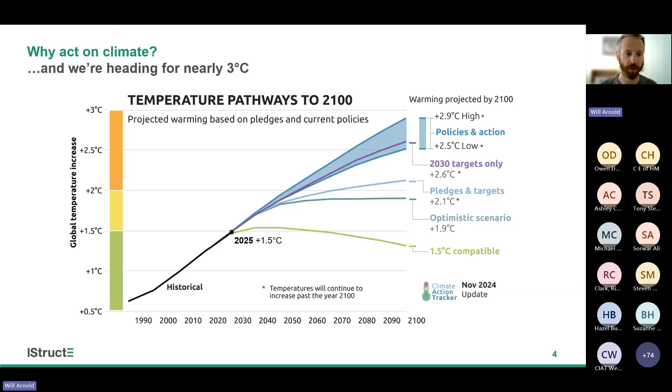They're going to be in their 80s. So this is real stuff that's happening to real people today. And those photos on the previous slide are just a taster of what's to come. This is only going to go in one direction. That's the sort of moral imperative.

But at the same time, we've got a bit more of a financial and legal imperative on this as well, and this is going to get stronger as a result of what's happening to climate. We've had senior people from banks such as Allianz speaking out recently to say that at about 3 degrees C, the property industry may well become totally uninsurable.

The insurance market, when it comes to property insurance, works on the basis of them hedging their bets against all of our properties. You pay them a bit of money each year, enough people do that, they build up their dividends, and every now and then they'll pay out in response to something like flood damage. But what they're saying is that at 3 degrees C, those weather-related impacts are going to become so frequent and so severe that they wouldn't be able to make any money out of this as an industry.

And at that point, property insurance ceases to exist. At that point, mortgages disappear. This entire industry has this existential threat that we're looking at if we don't get climate change under control. That was a quote from a senior figure at Allianz.

It's interesting to note that if you look back about 10 years or so, the chief exec of AXA around that time said almost the same thing. He was saying it at about 4 degrees was his guess for that point in time. Allianz are now saying 3. It'd be interesting to see where that figure has been put in 10 years' time from now. But this is a significant, a serious, and a real world thing.

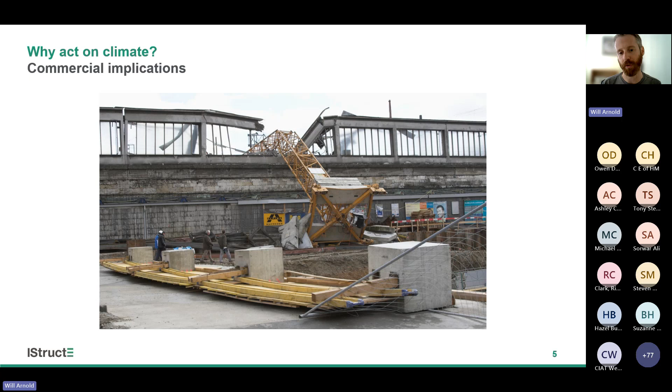And again, this is a reason why we need to act. And just in case the commercial bit and the moral bit wasn't enough, and you feel you need something more to argue with your clients or your collaborators with, this is moving into legislation now. This is only going to go in one direction from a legislative point of view.

This is what we see overseas in the EU. The EU have mandated that from 2028, embodied carbon submissions will be required for all major projects. And from 2030, that will be extended to projects of all sizes, and will also then include legal limits on the amount of embodied carbon you can emit during construction.

We've seen countries doing this for a while now. Nordic countries for several years, France for 2 or 3, the Netherlands I think for about 10 or 12 years, they've had this sort of approach in place. And we even see this happening in states of the USA. So California, Colorado, New York, Oregon, they're the big 4 that always stick in my mind. They all require embodied carbon reporting. And this is in the USA with all of the stuff that's going on around climate and legislation at a federal level.

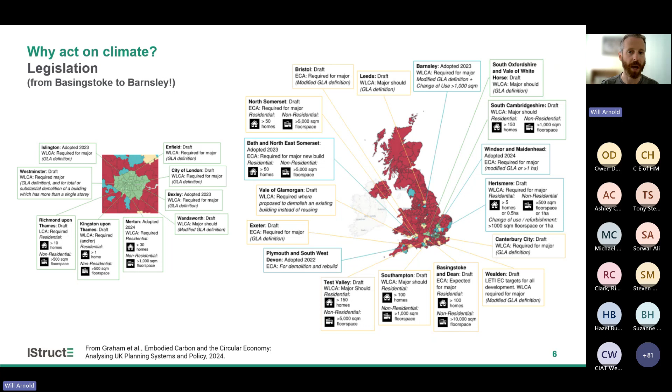The UK will follow suit. It's inevitable, just a matter of time before it happens. So that's the contextual bit, the bit that tells us the need to start caring about this. We now need to move on to what we can do about it.

If you're not aware of who the IStructE are, we've been around for just over 100 years. We're the world's largest membership organisation dedicated to structural engineering as a profession. We've got about 30,000 members, about 2/3 of those in the UK, and the other 10,000 spread around the world. We cover nearly 140 countries.

What's important, and the reason why I put this slide in when I speak to external groups, is that we have a royal charter that means we have to exist for the public benefit. The reason for an institution like ours to exist is to help protect the public when it comes to their buildings. We were set up in response to the rising use of reinforced concrete back in 1908, the turn of the 20th century.

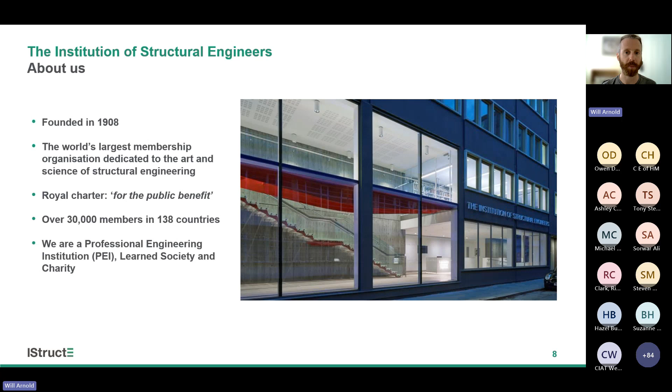About 5 years or so ago, our board and council made a commitment that from now on we would treat sustainability the same as safety, because they are, in effect, one and the same thing. This has led to all sorts of changes in the way that we do things.

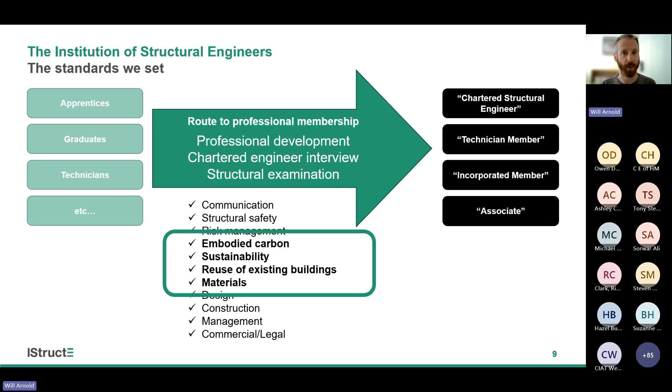If you want to become a chartered structural engineer now, as part of that you'll be tested on whether or not you can calculate and reduce embodied carbon, whether you understand sustainability in broad terms, your experience of reuse of existing buildings, and what you can do with materials. These are now requirements to become a chartered structural engineer. So if you're working with one of those structural engineers, you can have that requirement as well. You should be able to speak about this stuff fluently with those engineers.

That's a sort of entry level thing for existing members who are required to complete CPD returns every year. We now mandate that they tell us what sustainability CPD they've done as part of that. We pull that out as a separate thing. So we're pushing this at all grades.

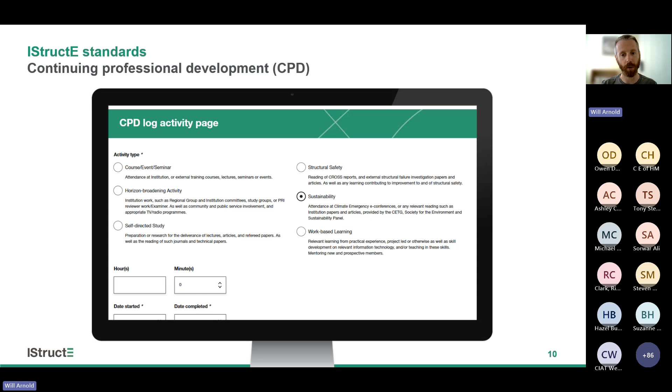At the top end of what we do as an institution, when we have our yearly awards, we refocused all of this a few years ago as well. It is now impossible to win a structural award without understanding the impact that your project has had on the planet. We've refocused our awards around the outcomes that result from our projects. If the outcome is that you've emitted bucket loads of carbon, way more than would be normal for the sorts of buildings you're working with, the judges need to be convinced as to why that was worth it. What was that ecological investment giving to society? What was the return on investment, if you like?

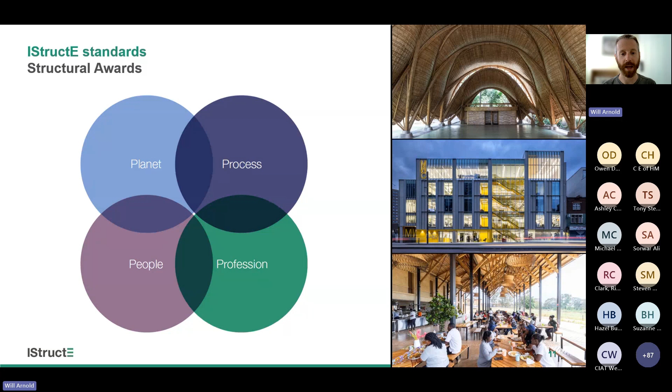As a result, what's been really interesting is we still get some big, bold projects entered into the awards, and some of them still win because there are very good reasons why people have done the things that they have. But what's been really interesting is we've also seen this whole new broadening within the awards, looking at a much more international set of projects.

Let's take a quick swig of water.

So that takes me on to the guidance we've produced. The first thing I always point people to on this topic is our sustainability resource map. If you search for sustainability resource map IStructE on Google, or any other search platform, this should come up.

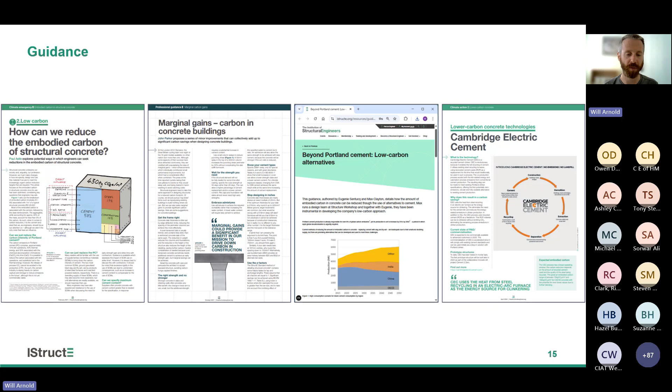There's then some other big hitting pieces within that. The first one I'd draw your attention to is this pair. On the right hand side, you've got the how to calculate embodied carbon guide. It's downloadable as a PDF, free for anybody who wants it. You have to make a login, but that's just so we know you've got it, so that when we create the 4th edition, you get an automated email telling you to download the new one.

What goes alongside this guide is the tool on the left. It's just an Excel spreadsheet, but it basically automates everything in the guide to save you time of having to do it yourself. These are probably 2 of our most popular downloads from our members. We know that something like 2/3 of our members now carry out embodied carbon calculations with most of their work, and about 2/3 of them use our tool to do this. So it's proved pretty popular.

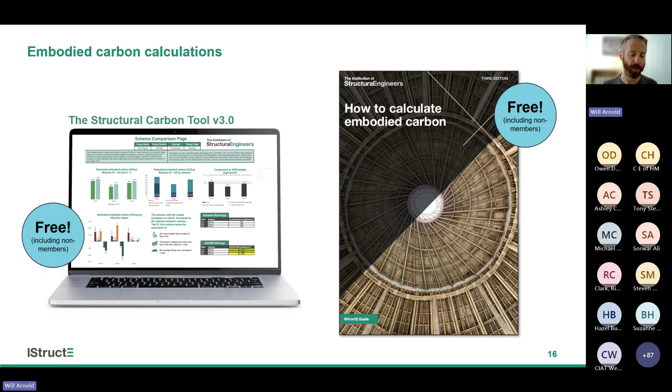I think it hits a really nice sweet spot where it's fairly simple to use if it's the first time you're doing something like this, but you can also customize it quite easily if you want to do more with it. We know people have embedded it into workflows, paired it up with things like Rhino and Grasshopper scripts. We make the tool available open access, so you can unlock it - it gives you the password on the information page, but I'm pretty sure it's just carbon. You can unlock it and change things, add different types of materials or change the functionality. We know people have translated it into other languages, made it applicable to other locations, that kind of thing as well.

The circular economy guide is super practical. It's not just about the principles of circular economy, but answering the question of how do I actually take, say, bricks from a project we're about to demolish and reuse those bricks on my project today. The guide is about two years old now, and this is a very fast-moving area, so obviously some things in it have come on leaps and bounds even in the last two years. We see a lot more steel being reused today than we did two years ago. But it gives you some really practical advice on this stuff.

Our online training courses - the main one I always tell people about is called Embodied Carbon Basics. This is free for members, but not for anyone else who wants it. If you were an affiliate member, you could get hold of it for free, or there's a small fee if you want to pay to do this in your lunch breaks. It's about 5-6 hours worth of online CPD. It teaches you how to calculate embodied carbon, tells you what to do with those results, goes into the nuances of different materials. It's pretty good, pretty in-depth, and all presented by experts on these topics.

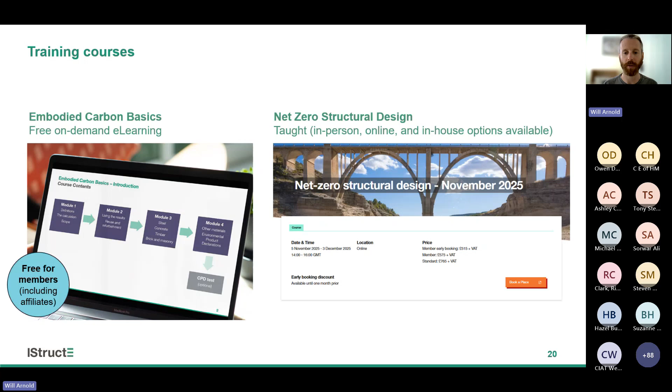And then we've got some formalized training courses. I mentioned Embodied Carbon Basics already, but the Net Zero Structural Design course, as an example, is taught CPD around this topic - a 5-week course. You get trained by myself and an expert in conceptual design, and we talk you through various stages of design and what you can do to decrease the carbon footprint of your project, that kind of thing.

And then the very final resource I wanted to touch on is called our Concrete Technology Tracker. A lot of people have told us this is one of the most useful things we've got out there. It's because if you go on the internet and search low carbon concrete, you could be forgiven for assuming there's like 1,000 different concrete technologies and they're all ready to go - you can buy them today, they're the lowest carbon thing ever, you just got to place your order. That's just not true. There's not 1,000 - we think there's probably about 15 different technologies being developed at the moment.

So what we've done is taken all these different products and grouped them together in these technology streams that you see on the slide in front of you. For each of those technology streams, we've done an assessment as to potential carbon savings, the technological readiness - could you buy it today, or is it being piloted with maybe small pours, or is it maybe still stuck in the lab, going to be a little while longer.

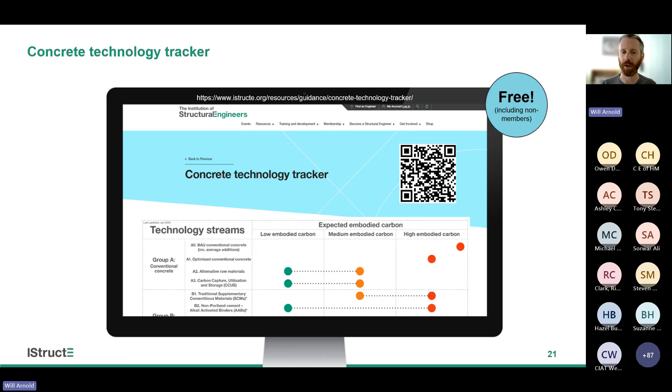And under each of them, we give a few questions you might ask if you were to get in touch with these companies. And of course we've got links to those companies we've spoken with about those technologies as well. So it's a bit of a wayfinding map into the world of concrete decarbonisation, which I think was quite sorely needed, given the opaqueness of all of that up until now.

Final bit then. I wanted to just talk at the very end about cross-industry collaboration, and I think it's quite fitting because obviously I work for one institution. I'm speaking to you today because of the CIAT, another institution, and the work that they're doing to share CPD in this space. This sort of cross-industry collaboration that I've seen on climate in the last 5 years in particular is really impressive, and it's like nothing I've seen on any other topic when it comes to the built environment.

We're doing our best to try and stay joined up, and I think it's something we should be quite proud of as an industry. Actually, we're not yet being directed to do any of this stuff by government, not at a project level, and yet we're seeing the industry move on it anyway because people know it's the right thing to do. They want to feel that we're creating something as an industry that we can all be proud of. So we've seen some real change happen in the past 5 or 10 years, and change that I think will only continue further and further forwards.

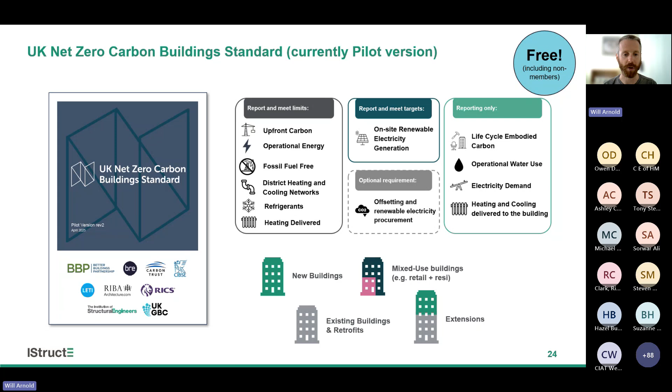And these are just the upfront carbon limits. This is modules A1 to A5. We don't set limits for future embodied carbon. There's another set of graphs and numbers for things like operational energy.

And the standard is based on as-built, in-use data. So we ask you to record actual measurements of material quantities, actual EPDs that you've used, and so on. These limits get tighter over time, partly because we expect people to get a bit better at reusing and using things more efficiently.

But actually, quite a lot of this curve just comes from the decarbonisation of materials themselves. The materials industry has its own trajectories towards net zero that they're now following, and we've reflected that, with a little bit of cynicism when we did it, within the limits you have to meet. So the idea is that a building built in 2030 and one built in 2025 - yes, one has a lower upfront carbon limit than the other - but they're both equally as ambitious, because we're reflecting the changes in technology and so on that we believe are coming.

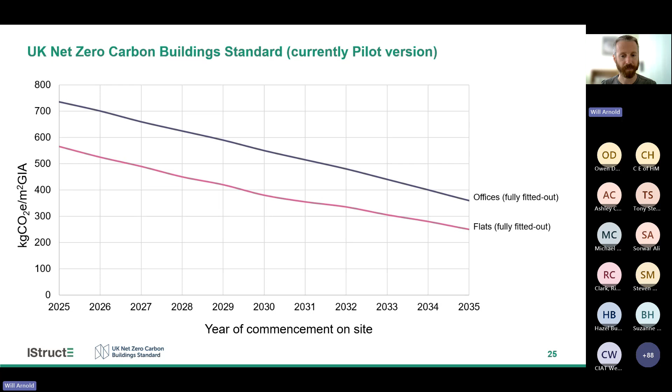That would build on top of whatever local authorities are doing. Planning could then follow regulation. It would mirror what the EU is doing on this topic, so our industry would be competitive with theirs when it comes to the demand drivers on decarbonisation of materials and so on.

Government's been doing research on this recently and published a report on it - happy to answer more questions if you've got them. I'd say this is slowly ticking along. I think it's inevitable that this will happen at some point, probably not quite on the dates on the screen, which is our proposal of 2026, coming into force on the 1st of January I think we said. But it will happen at some point, because if it doesn't, we're going to be sat there as an island surrounded by countries doing all of this, and that would make no sense.

If you've not seen this before, have a look at it. If you think it's something you support, do look at the list of supporters. And if your company is not listed, please use the add your support button to give us more signatures. We've currently got about 250 signatures on there.

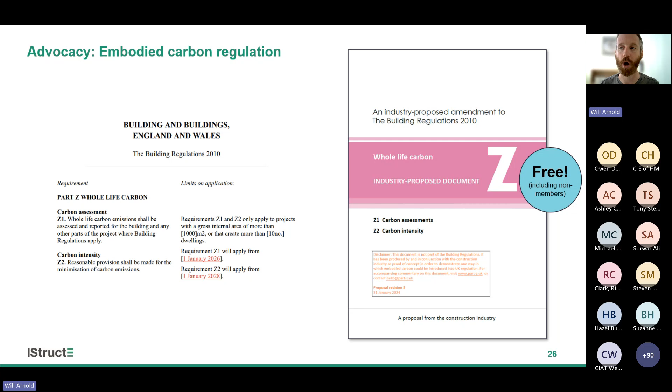We'd like to get that number as high as we can. We know that when we speak to governments, it helps if we can say the whole industry is behind something.

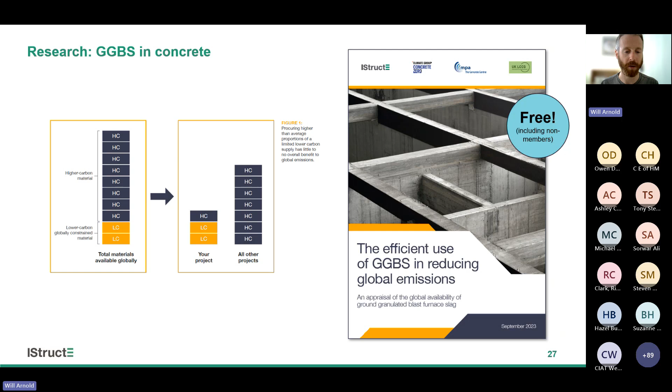Just two more slides, and then I'll hand over to Q&A since we're approaching time. I want to talk about two thought leadership papers we've helped produce cross-industry in the last couple of years. One is on the use of GGBS as a replacement for cement, and the second is on the role of scrap in the production of steel.

The two reports follow a similar path. They both talk about the problem with hoarding a low carbon material at the expense of everybody else in the industry who can no longer use that material, one that's got a finite limit to how much can be used each year. And they call out what to do about those things.

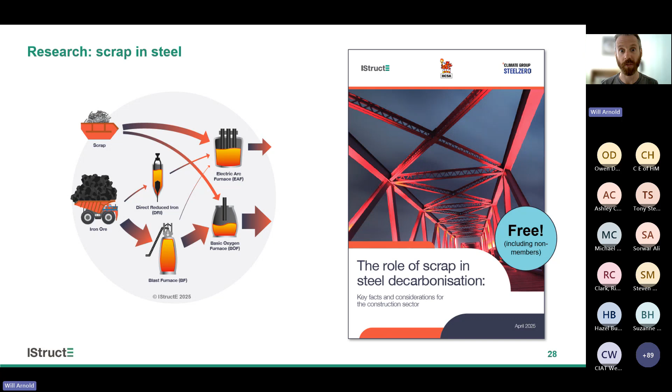So if you're involved or speaking to people about what type of steel or what type of concrete you might be using on a project, do check these out. They've been quite useful to a lot of the industry. And with that, thank you very much.